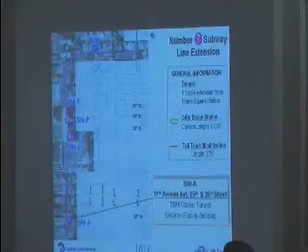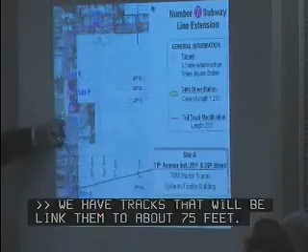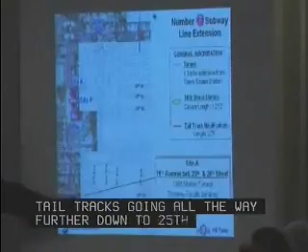And we have tail tracks that will be modified, lengthening things by about 275 feet. Remember, the station ends up around here, and then we have tail tracks going all the way further down to 25th Street. At Site A, right here, is where we're going to launch the TBM starter tunnel.

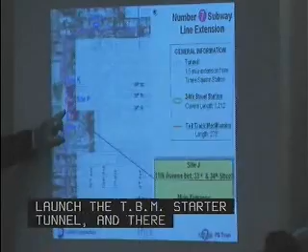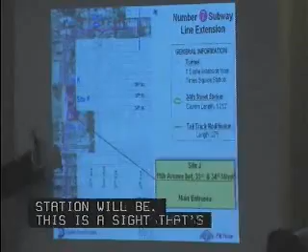The 11th Avenue site, Site J, is where the main entrance to the station will be. This site is going to be built with a developer. Actually, all of these sites have development with private developers that are working with us.

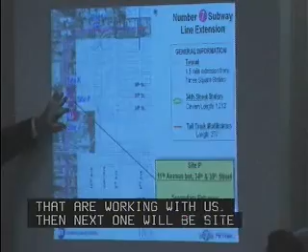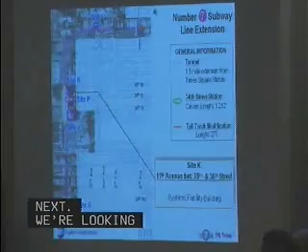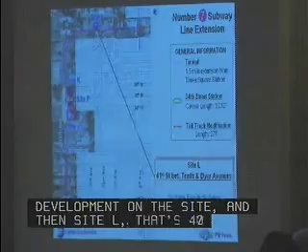Next will be Site P, between 34th and 35th, where the secondary entrance to the station is. Next, we're looking at Site K, 35th to 36th Street, where a system facility building will have to be incorporated with the development on the site. Then we go to Site L at 41st, between 10th and Dyer Avenue, where there's another system facility building, and this is actually where we used to have the 10th Avenue station.

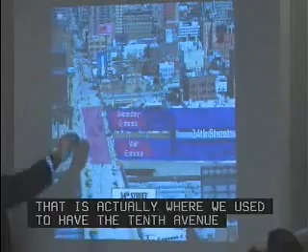This is where the station will actually be, with the main entrance between 33rd and 34th, and the secondary entrance above that.

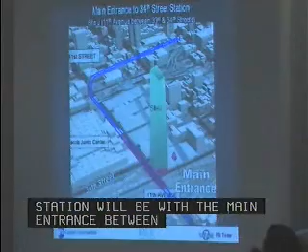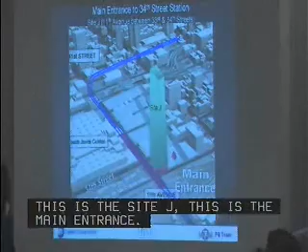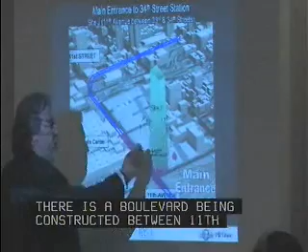Just wanted to show you, this is Site J, this is 11th Avenue, and this is the main entrance. The main entrance is going to be along a boulevard. There's a boulevard being constructed between 11th and 10th Avenue that goes diagonally. At this point it's one direction only, and at 34th Street it starts becoming a real boulevard with a planted median and so forth.

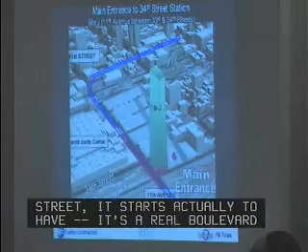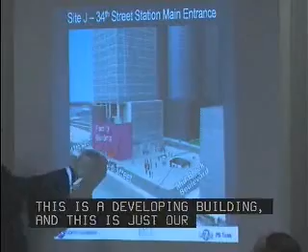This is at 33rd and 34th. This is the developer building, and this is just our interpretation for the moment. We're going to have a facility building on this particular site at 33rd, and the entry point will be mid-block on the boulevard.

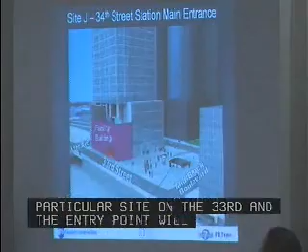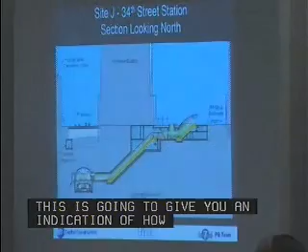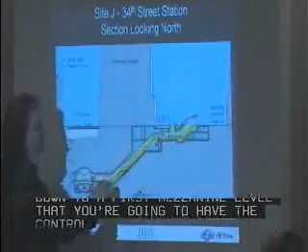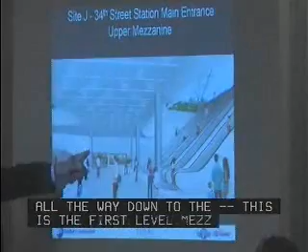Now we go to the second mezzanine, and the entry is going to be somewhere here. From here, you go to the platform level, and that's where we are.

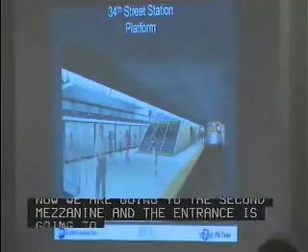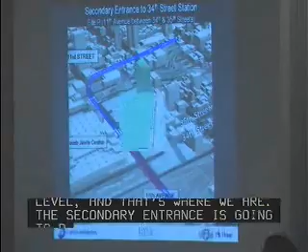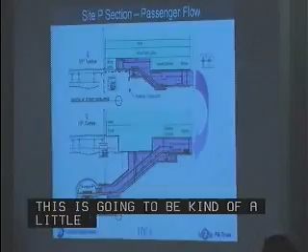The secondary entrance is going to be on Site P, with the entry point from 35th Street, right here. This is the developed site, and it's going to be a little more complicated because it's a switchback type thing. You come down, you enter, and then you have to go further down.

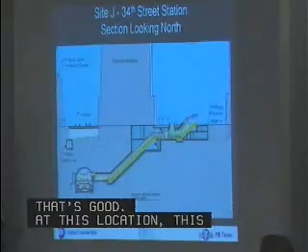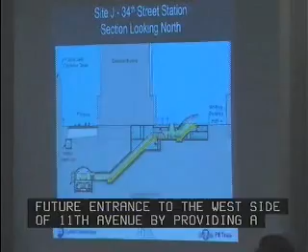Just so we all understand - could you go back a couple of slides, please - at this location, Site J, we are providing a future entrance to the west side of 11th Avenue by providing a knockout panel that could be connected to the convention center, if one wants to do so.

Go back to where we were.

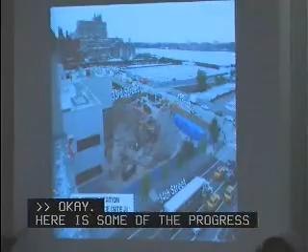Okay, here is some of the progress work at site J that we talked about before. There is a FedEx building here that is now being demolished. We have acquired this, and this is a demolition that took place.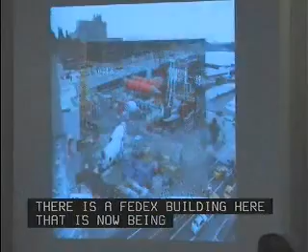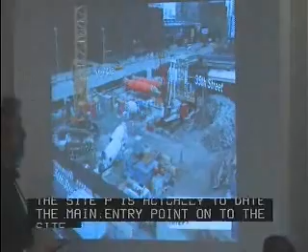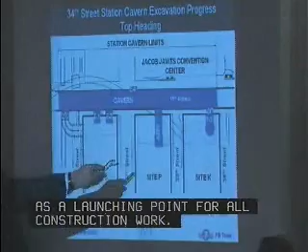Site P is actually today the main entry point onto the site. We have the air ventilation shafts going from there. This site is really being used as a launching point for all construction work. You have site J, site P, and site K. What you see from here to there is the completed excavation that was done, basically drill and blast.

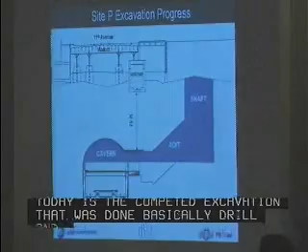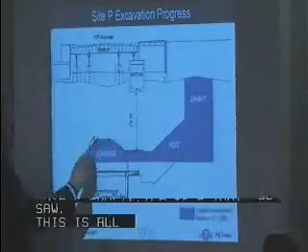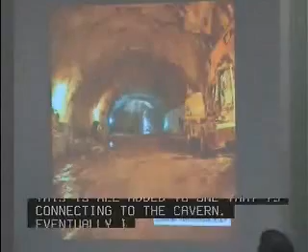This is site P, where we do have a shaft. This is the site that you saw. The shaft has been done. This is called the adit, the one that connects into the cavern, and the upper part of the cavern has been excavated. Eventually you'll go all the way down to track level. This is how it looks, looking north from site P. This is only the upper part. This is looking west from site P, so that's what we are seeing. This is looking into the cavern.

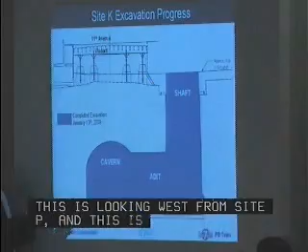Now this is site K, where the excavation is much deeper. We went further down. By the way, these are January 13 pictures, so we actually know where we are. This is looking into the site.

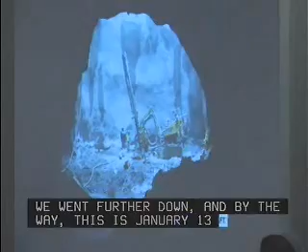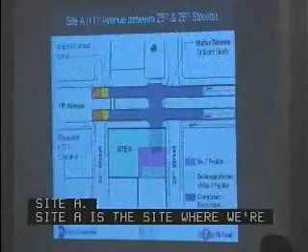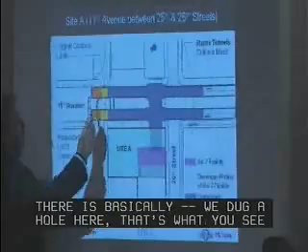And then we are now going to site A. Site A is the site that we're going to launch the TBM from. We dug a hole here. That's what you see already has been excavated. These two pieces in yellow are the additional excavation on the original contract limits, and the two orange pieces are something added at the request of the Transit Authority.

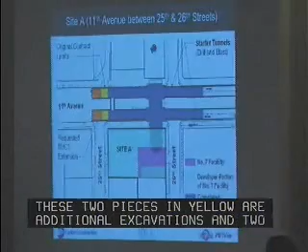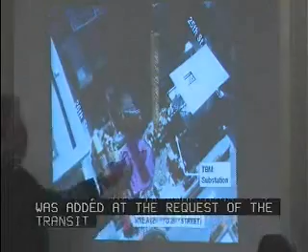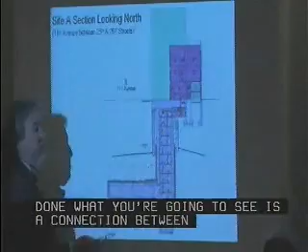This has already been completed, excavated on January 13, and this gives you an indication where this hole exists right now, partially covered. When it's done, you're going to see a connection between the tail tracks. This is an escape route as well as access to the ventilation. This is our building, and it's going to be incorporated into the developer building.

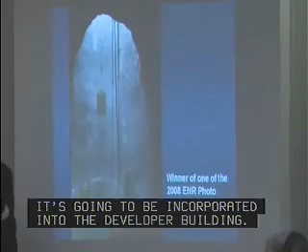This is actually a picture that appeared in Engineering News Record, our photographer won a prize for one of the best, and this shows how people are being lowered into the cavern these days.

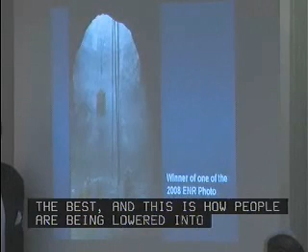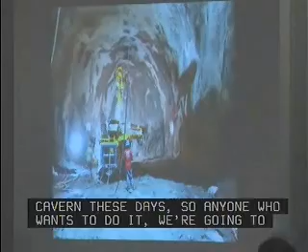This is again looking from site A. This is the one with the cavern looking west. And this is looking at the starter tunnel, and these are the two tail tunnels looking south.

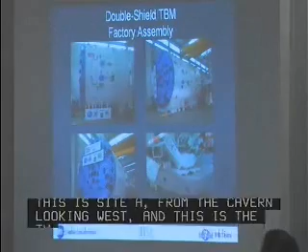The good news is that the double shield TBM has been assembled in the factory. We went there, we witnessed it, and in fact pieces have already arrived on site. This is the cutter head, on site today, and the expectation is that it will be lowered, assembled, and lowered in the near future.

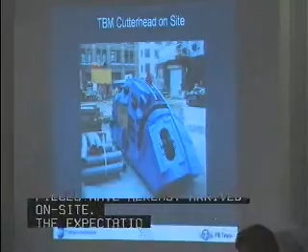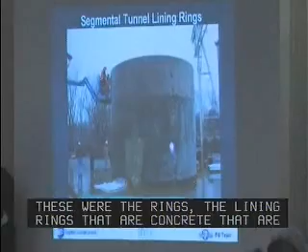These are the lining rings, made of concrete, that are being manufactured at the plant in Pennsylvania. As we move through the tunneling, these rings are being placed behind the machine, creating a precast liner for the tunnels.

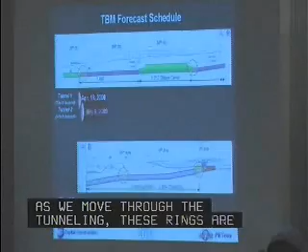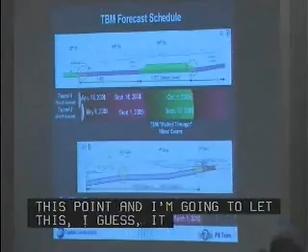Let me give you an indication. I'm going to take you through this, we'll start at this point, and I'll let it run, because it runs faster than I can talk. What we have here is the TBM will start at this location, and there are two starting points on the TBM, Tunnel 1 and Tunnel 2.

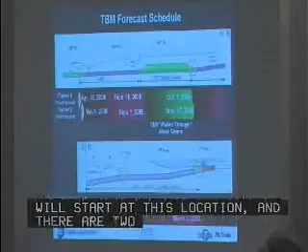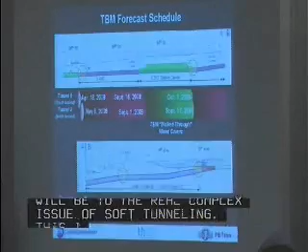The first part of the TBM will go through the real complex issue of soft tunneling. This is an area where we actually froze the ground, and the advance is going to be much slower here. We expect this to happen sometime in September, okay?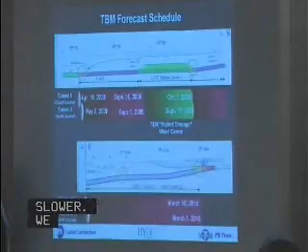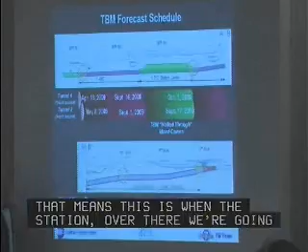We're going to end up at this point, which means this is when it reaches the station cavern. Over there, we're going to walk the machine through because the cavern will be totally done already—there's no need for boring. This is something that has changed since the original contract.

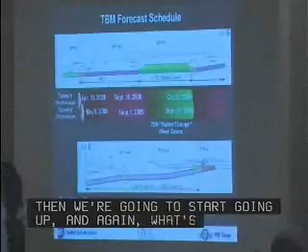And then we're going to start going up. What happened is that this area is identified because whenever you restart an operation, all of the problems start again. So as long as you advance and you dig, you have no issues.

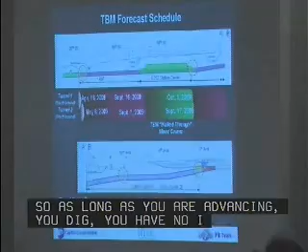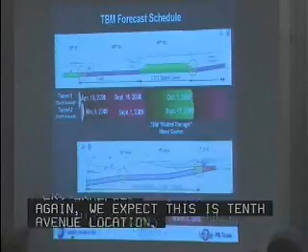But when you stop and start again, that's when you really have to be very careful. And again, we expect this at the 10th Avenue location, we're also looking at it carefully because the cover here is rather small. And then, last but not least, when we arrive next to the Port Authority building, that's really where we need to be very careful.

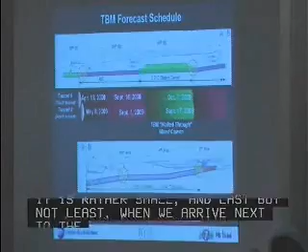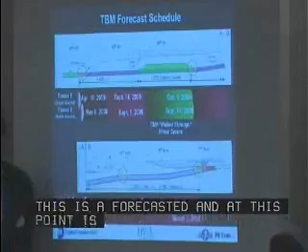So we expect by mid-March to be done. This is forecasted, and at this point it's forecasted to be about 3 to 4 months ahead of schedule. But it's a forecasted number right now. But it's better to forecast early rather than late, right?

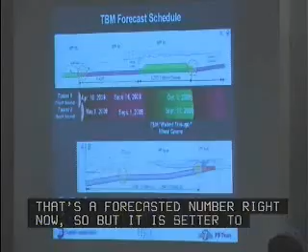So, next, this actually shows you the ground freeze area. It shows you that we have a drop in the rock line, so that's an issue.

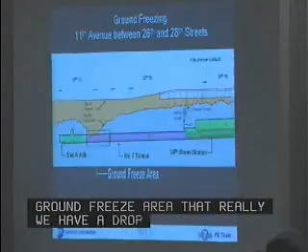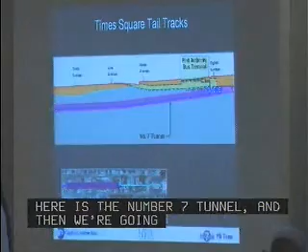And then here is the number 7 tunnel, and we're going here under the A, C, and E lines. Next, this is what you saw here before, the existing tail tracks of number 7. This is the A, C, and E.

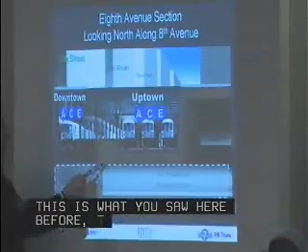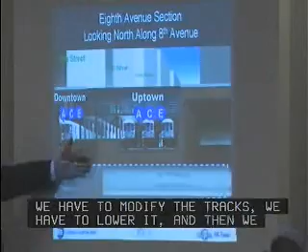So what we need to do is go under and connect to that. We have to modify the tail tracks, we have to lower it somewhat, and then we have to underpin this because we're basically taking out part of its foundation. So we have to carefully work our way around it. And this is a picture of the work there. Next, that's it, this is number 7.

Okay, yes sir, turn the lights up. As usual, I have a wind-up and then a question.

Here's the wind-up: the tunnel boring machine components, as I recall, were supposed to be here in May or June. They're on site already. You're projecting completion 3 or 4 months early. You've solved the extra 275 feet and provided for the 2 facilities building very gracefully and simply. My question is, are you using MTA Capital Construction employees, or did you bring all these people from Germany?

How is this possible? Well, actually, we have a good contractor, and he's doing a good job, very experienced. They decided to do something that created these possibilities by mining drill and blast rather than waiting for the machine. So by doing a lot of work ahead of time, they were able to create for themselves, let's put it, a float. That means they themselves create it. If they are late, we have nothing to say. But they are very early. It's a good thing, so they will be out earlier. They probably are going to make more money, I assume.

Right now it looks good. We still have to work with them to understand at what point we're going to be able to take over some of the area so we can start putting the systems in place. So yes, it is done, and it's proof that it can be done well. But it depends on the contractor as well. Having a good contractor makes a hell of a difference.

Okay, any other questions? Okay, I would have been disappointed if that was going to happen.